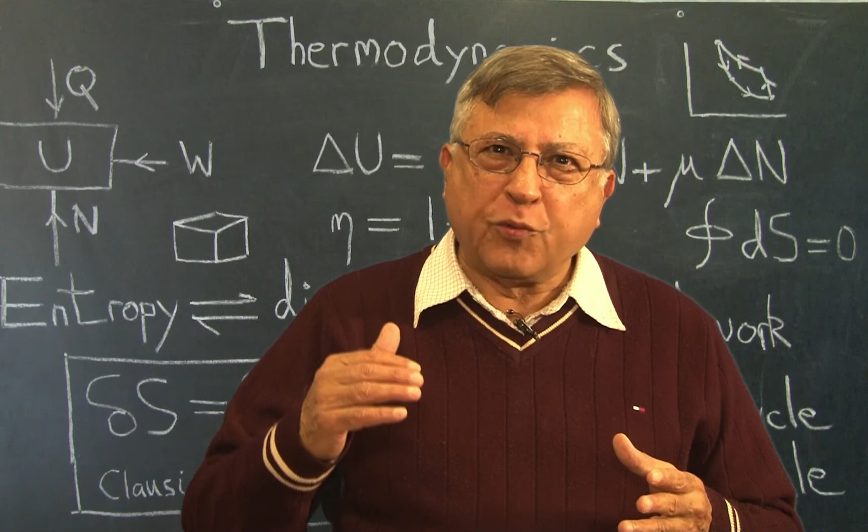Before we move to our discussion of thermodynamic engines, let us remind ourselves about the nature of heat. Heat is a form of energy, but a very particular form. That energy comes from randomized motions of the constituents, which could be atoms, molecules, quarks, gluons, or whatever, but on average their momentum adds up to zero. So an object can be at rest but have a lot of energy if its constituents are moving rapidly enough.

On the other hand, if those constituents are moving in one direction, then the whole object has kinetic energy, but it could be very cold and have no heat or thermal energy. So heat is randomized energy, whereas kinetic energy is organized motional energy.

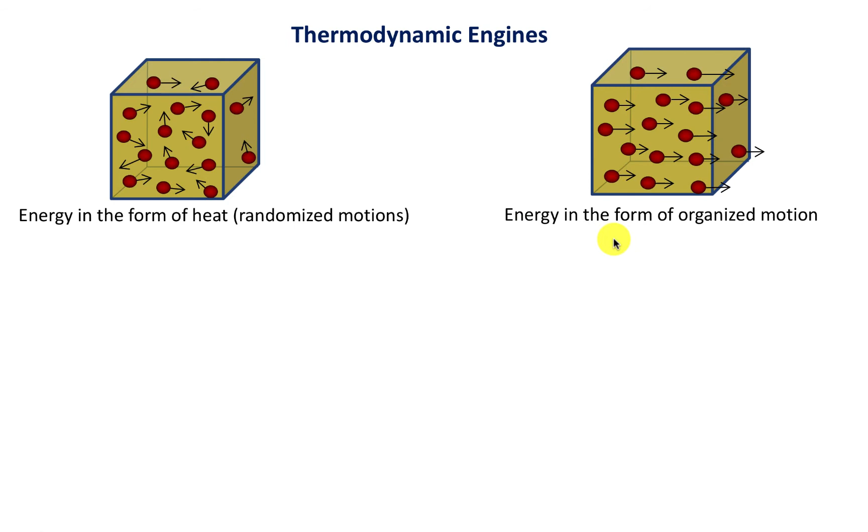We're going to define a thermodynamic engine, or heat engine, as that which converts heat into mechanical work. It could also convert work into heat, but it has to be done through a cyclical process, meaning that whatever state the heat engine started with, it returns to that state at the end of the cycle. So suppose you started with a certain pressure, volume, and temperature - as you go through the various processes within the engine, you ultimately end up at the same pressure, volume, temperature. In this process, work is done.

That work is P dV, and if we add up those little bits of work done as we go around the loop, that is the integral of P dV. This integral has a loop which signifies that the initial point and the final point are the same.

The engine must always respect the first law of thermodynamics, which says that the change in internal energy, delta U, has to equal the amount of heat you put in - say from burning fuel - minus the work done by the engine. Now U, the internal energy, is a state function depending on P, V, and T. So when you come back to the original position, the net change in delta U has to be zero, which means delta W and delta Q have to be exactly the same.

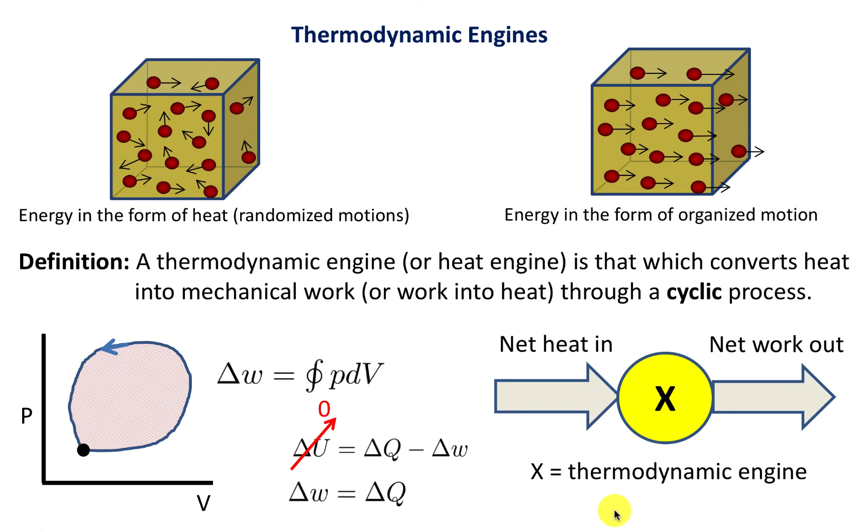Let me denote a general thermodynamic engine of any kind with this circle, labeled X. Whatever heat flows in is converted into work, and I stress this is the net amount of heat that comes in - some heat could come in and some heat could go out. The net heat is the incoming heat minus the outgoing heat.

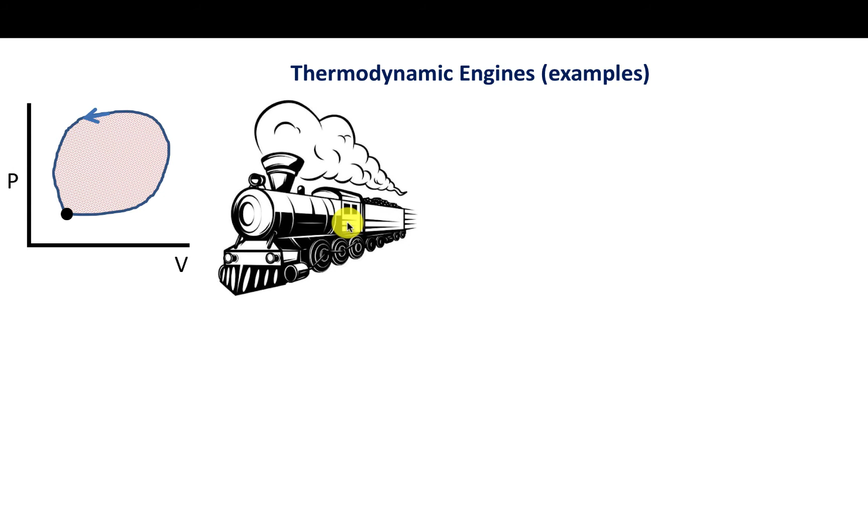Historically, thermodynamics was developed at a time when heat engines like the steam locomotive were being developed. The coal provides the incoming heat, and from the exhaust is the waste heat. The work, or useful work, is that which the locomotive does in pulling the train along. Now we have more sophisticated engines, but the idea is the same: you burn fuel that provides heat, waste heat comes out of the exhaust, and the useful work is what the engine delivers to the tires.

The general idea behind all thermodynamic machines is that there is a high temperature reservoir and a reservoir at low temperatures, which could be the environment to which the waste heat is thrown out.

We denote the amount of heat taken from the high temperature reservoir as QH, which flows into the engine, whether it's this or that. Work is done, and waste heat flows out into the low temperature reservoir, which could be the atmosphere. By the first law of thermodynamics, the useful work done is equal to the net heat, which is the heat taken at high temperature minus the heat rejected at low temperature. Here H means hot and C means cold.

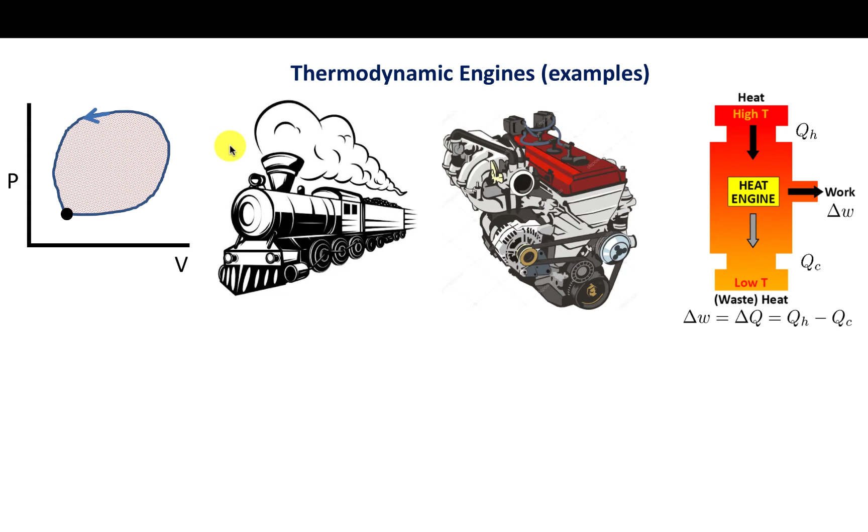Let's not think that thermodynamic engines are restricted to things we make. In fact, there are thermodynamic engines in nature as well. Here is a model of the Earth's atmosphere, which can be modeled as a thermodynamic engine. Heat from the sun is absorbed by the Earth's surface, more at the tropics and less at higher latitudes, the extra tropics. Some is reflected back, but the net heat received at the tropics is greater than at higher latitudes, so the surface temperature there is larger. Again, we have a high temperature reservoir and a cold temperature reservoir, and between them operates a heat engine that does work by moving air from here to here. This helps us understand some aspects of atmospheric physics.

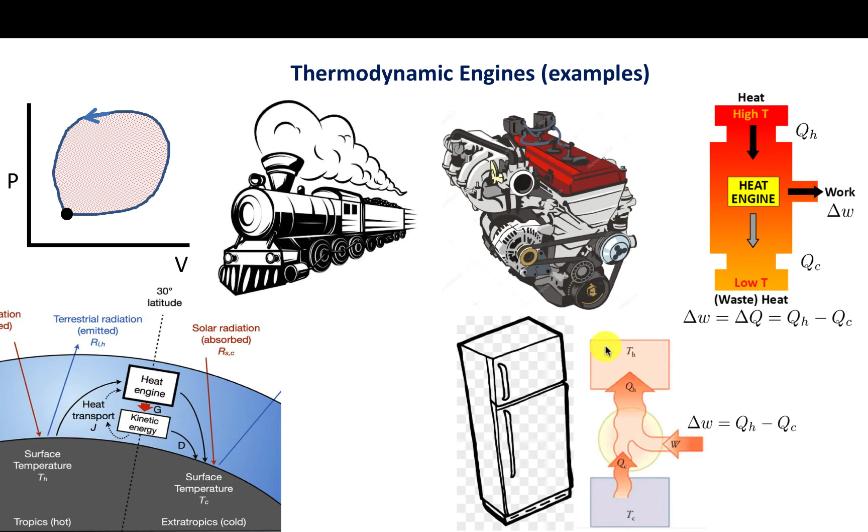As another example, consider a refrigerator, the ordinary household refrigerator, which takes heat from whatever is inside, that's the cold reservoir, and expels heat into the environment, the high temperature reservoir. But this can't happen by itself. The electric motor inside has to do work, so you must supply work in order to move heat from inside the refrigerator to outside. You could say this is a heat engine operating in reverse.

Many principles of thermodynamics were discovered by Carnot, and in particular we will spend time understanding the Carnot engine, which is a reversible thermodynamic engine. Remember that a reversible thermodynamic system is one that is in equilibrium at every point. This engine uses some working substance, which could be either a gas or a liquid.

In the first part of the cycle, the working substance, gas or liquid, expands isothermally from point A to point B. Isothermal means that at every point the temperature is constant, and that constant temperature is the temperature of the reservoir. So at every point along this path, the temperature equals the temperature of the hot reservoir. Obviously TA and every point over here, including TB, are equal.

Then from point B to point C is an adiabatic expansion. Adiabatic means that no heat is allowed to enter or leave the engine. Then from point C to point D, we follow a path which is again isothermal, but this time it's compression, so the volume is decreasing instead of increasing. Once we reach point D, adiabatic compression takes place, so again no heat is lost or gained on this path, but now the volume is decreasing, whereas earlier it had been increasing.

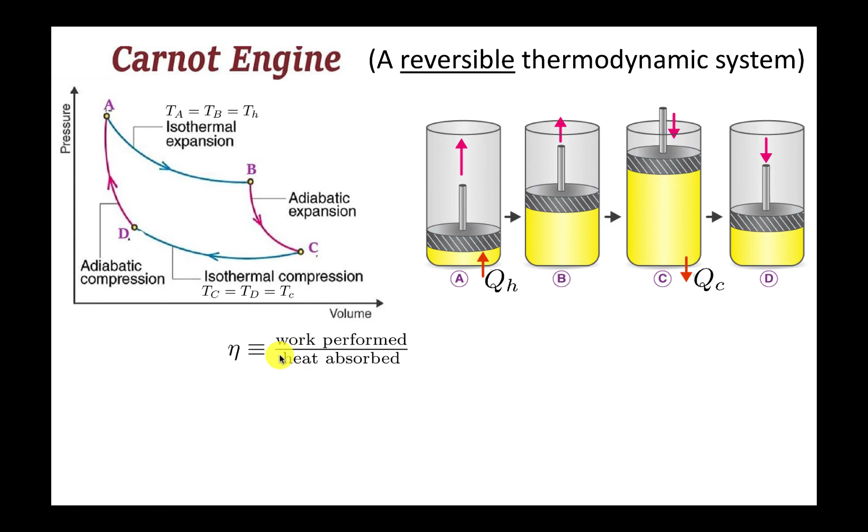However, work is done on every segment, because the volume keeps changing. Let's define eta, the efficiency, as the total work performed over one cycle divided by the amount of heat absorbed. From the first law of thermodynamics, that amount of work, delta W, is QH minus QC.

When we divide by the amount of heat absorbed, that heat absorbed is QH. So eta is this quantity, 1 minus the amount of heat expelled divided by the amount of heat put in from the hot reservoir. Of course, if QC was 0, if no heat was expelled, if there was no waste heat, then the Carnot engine's efficiency would be 100%.

The Carnot engine is very important in thermodynamics. You can ask the question, has anyone ever built a Carnot engine? The answer is no. Why not? Well, there are at least two good reasons.

First of all, a Carnot engine has to be a reversible thermodynamic system, which means you have to do things very, very slowly. To go from this situation to this, to this, and come back, or to go around this path, would take an infinite amount of time, theoretically. Of course, actual thermodynamic equilibrium is established after a few atomic collisions, so one really doesn't need an infinite amount of time. A few microseconds could be enough, for example.

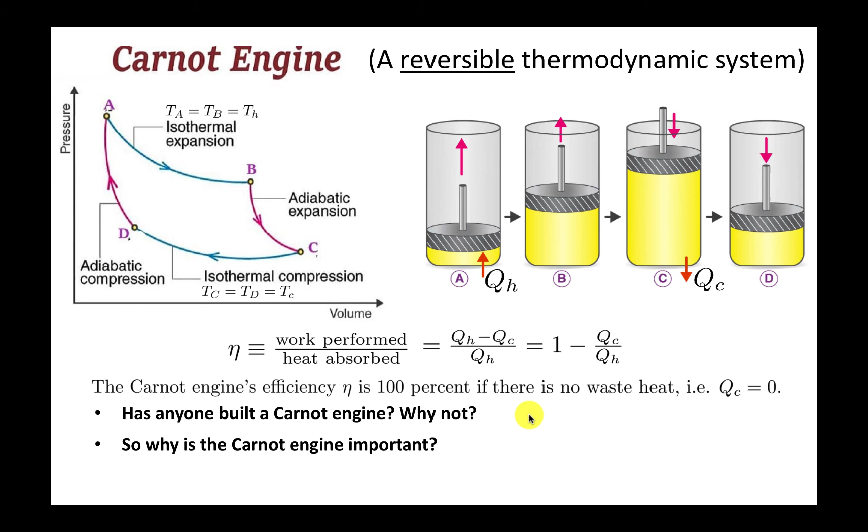Then you can ask, why do we waste so much time studying the Carnot engine? Why is it so important? The answer is because we can gain a great deal by studying free particles in classical mechanics, and we can gain a great deal from studying the Carnot engine in thermodynamics. They are both abstractions, but abstraction is what physics thrives upon.

Let's now come to something absolutely fundamental, the second law of thermodynamics. There are many ways this law can be stated. One is by Lord Kelvin. His statement is that heat cannot be extracted from a reservoir and converted entirely into work.

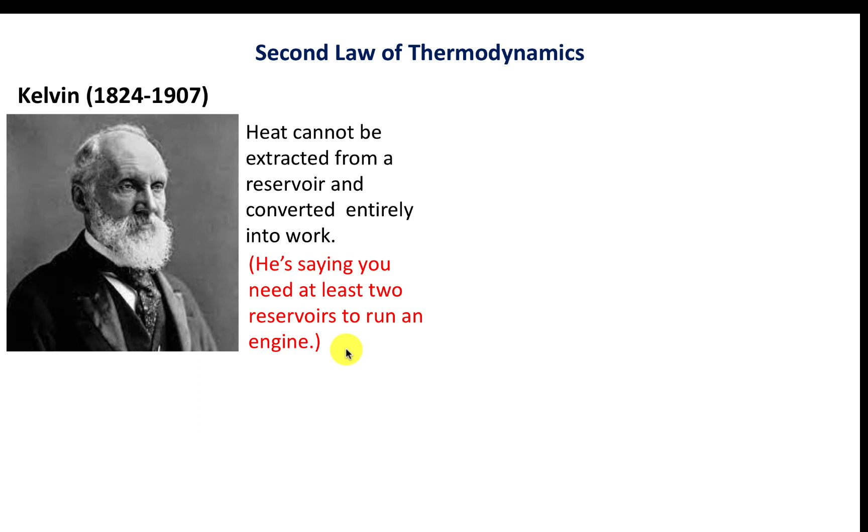So Kelvin is basically saying that you need at least two reservoirs to run an engine, a hot and a cold reservoir. Another way of expressing the second law comes from Clausius. According to Clausius, heat cannot go from a reservoir of lower temperature to a reservoir of higher temperature. Basically, he's saying heat can't flow from a cold body to a hot body by itself.

By itself means you have to do something else to make heat flow from a cold body to a hot body. Now, from the Kelvin statement, the efficiency of any thermodynamic engine must be less than 1. Remember, he's saying you cannot convert heat entirely into work, and efficiency is defined as the work done divided by the heat put in. So obviously, eta is less than 1 according to the Kelvin statement.

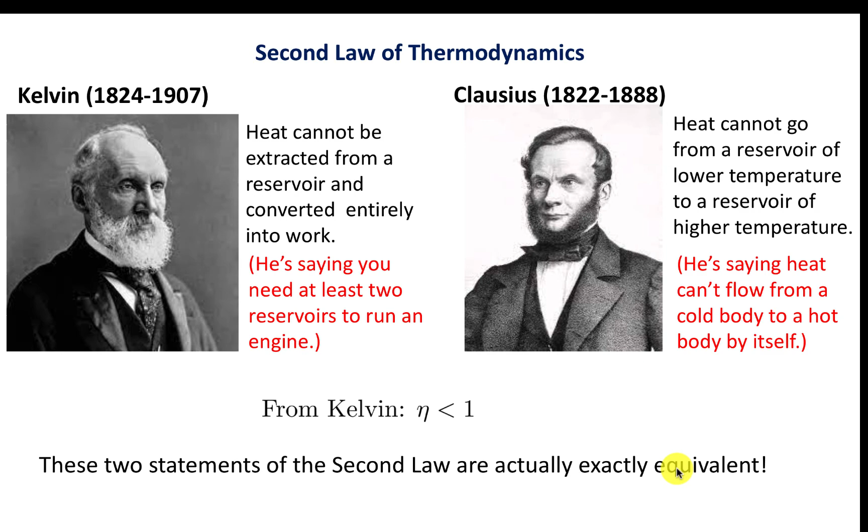Now, these two statements appear to be very different, but in fact they are exactly equivalent to each other, and this is what we shall establish. So, suppose that Kelvin is wrong. Then the engine produces no waste heat.

It is 100% efficient. In terms of pictures, what that means is that heat is taken from the hot reservoir and converted by this thermodynamic machine entirely into work. There is no waste heat that flows into the cold reservoir.

Now suppose I take the work done by this engine and use that in another engine, which then takes heat from the cold reservoir and puts it into the hot reservoir. Now, these two can be made at the same temperature, in which case what has happened is that heat taken from the hot reservoir has then taken heat from the cold reservoir and moved it to the hot reservoir.

So, if Kelvin is wrong, then Clausius is also wrong, because contrary to what he said, heat has indeed flowed from the cold to the hot.

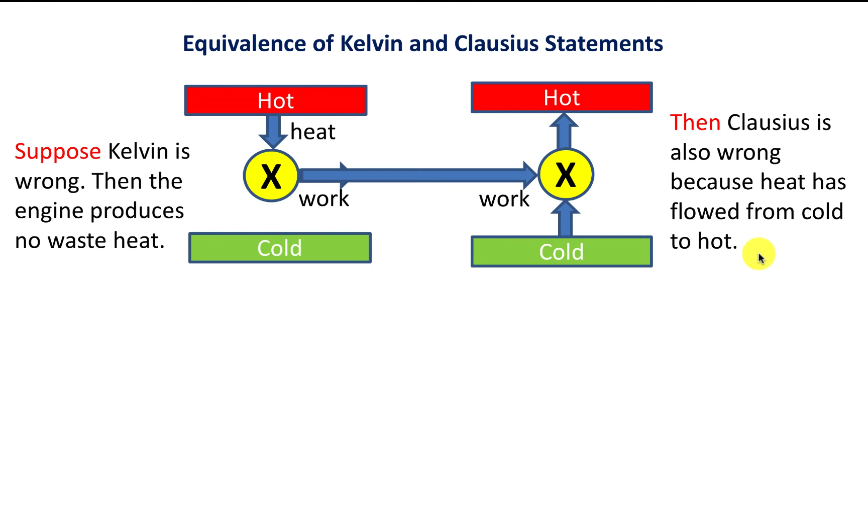Now suppose Clausius is wrong. Then heat can flow from the cold to the hot reservoir all by itself. Okay, let's then take a second machine. That machine takes heat from the hot reservoir and converts it into work.

Now imagine the following: suppose these two hot reservoirs are at the same temperature, and these two cold reservoirs are at the same temperature as well. So the heat Q which goes up then gets returned over here, in which case this hot reservoir is not playing any role at all.

So in fact, what has happened is that from this cold reservoir, remember there is only one now, net work has been produced. But if that is so, then Kelvin is also wrong, because work is produced using one reservoir only.

So, to summarize, the Kelvin and the Clausius statements are exactly the same. If Kelvin is wrong, then Clausius is wrong. If Clausius is wrong, then Kelvin is wrong. And so the two are exactly the same.

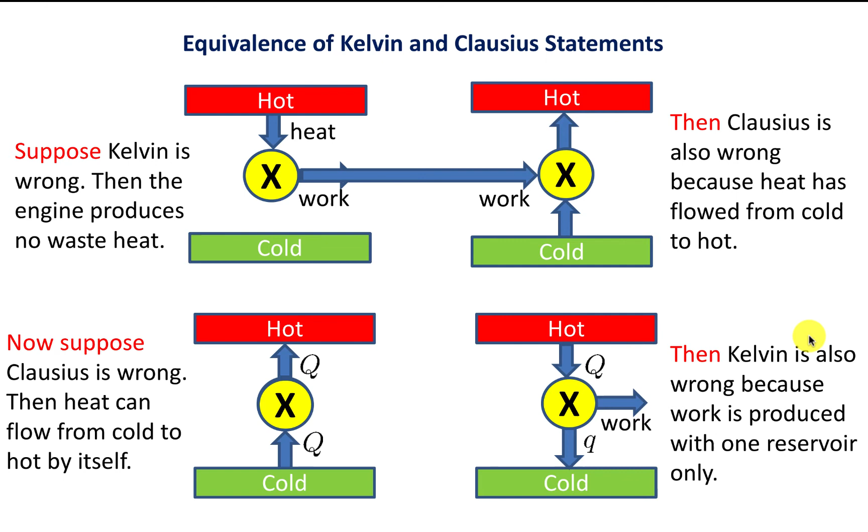Let's now use the second law of thermodynamics to derive some very interesting consequences about the Carnot engine. In fact, this Carnot engine is universal. What that means is that whatever Carnot engine you make, so whatever its shape, size, the nature of the hot and cold reservoirs, or whether you use a liquid or a gas, and whether that gas is an ideal gas or not, in every case we'll be able to see that the Carnot engine has universal characteristics.

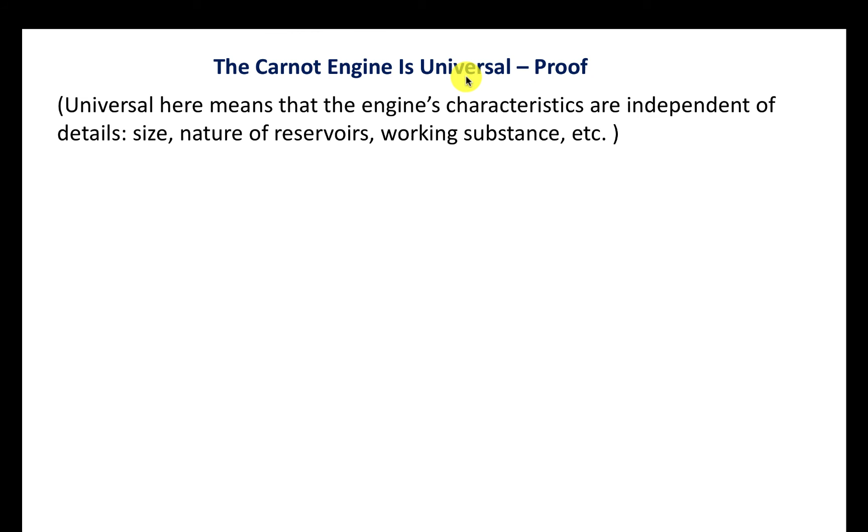To prove this, let's take a hot reservoir and a cold reservoir, use this engine, and this engine can be any engine. It can be a non-reversible engine, not necessarily a Carnot engine. So this engine takes in heat Q1, expels heat Q2. The amount of work that it does is the difference of the two.

Now, between the same two reservoirs, we have a Carnot engine. But this Carnot engine will be operated in reverse, which means that we are going to give it work. We're going to put in work and pump heat out from the cold reservoir into the hot reservoir. So this is just the Carnot engine that we talked about, except that all the arrows have been reversed. This is going in instead of coming out. This is going out instead of coming in, and same for here.

Now let's do a little bit of bookkeeping. So we're getting energy W out from here. That W is Q1 minus Q2. And we're putting in work W prime. So the net amount of work that we're getting out is W minus W prime, which is simply this.

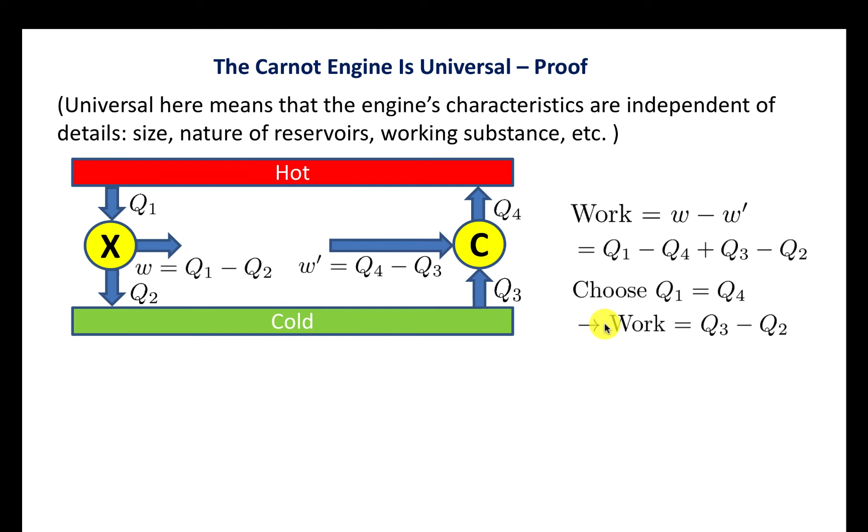Suppose I choose Q1 equal to Q4. That means the heat that's coming in over here is equal to the heat that's going out over there. In that case, the net amount of work is simply Q3 minus Q2.

But we've just heard Lord Kelvin say that work cannot be extracted from a single reservoir. You need two reservoirs. But look, over here, this is essentially one reservoir because the same amount of heat is being extracted as is being given back. So you can just remove this reservoir, and so we have one reservoir only, just the cold reservoir, in which case the work has to be zero or a negative quantity.

So this work is less than or equal to zero, which means that Q3 has to be less than or equal to Q2. We talked about engine efficiency earlier. That was the ratio of the work that is extracted from the machine divided by the heat that is put into the machine. And so the engine efficiency for X is simply the work, which is Q1 minus Q2, divided by the heat that is put in Q1, and that's eta X, which is 1 minus Q2 over Q1.

Well, we can do exactly the same for the Carnot engine, and here, if you simply reverse all the arrows, the efficiency of the Carnot engine is then simply 1 minus Q3 over Q4. But since we have chosen Q4 and Q1 to be the same, it's equal to this quantity. However, you see that Q3 has to be less than or equal to Q2, and so that says that eta C has to be bigger than or equal to eta X.

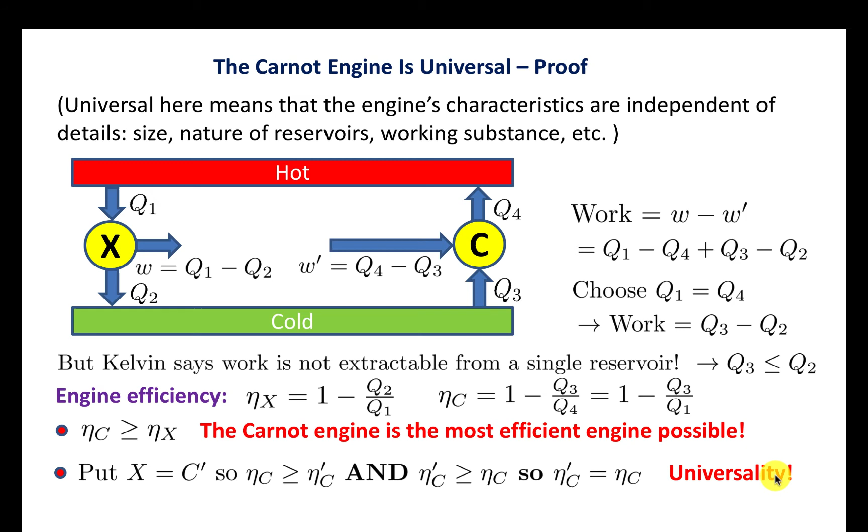That's because we've compared it with an arbitrary engine, X. But of course, we could have chosen X to be the same as C. Then let's put X equal to another Carnot engine. So eta C then has to be greater than the efficiency of C prime, but also the efficiency of C prime has to be greater than the efficiency of C. So obviously there's only one solution, which is that the two Carnot engines are equally efficient. In other words, this is a proof of universality. It doesn't make any difference as to what that Carnot engine is made of.

Let's now analyze the Carnot engine, but now assume that the working substance is an ideal gas. That makes it possible to do the calculations easily. So, to remind you, here is the situation: this isothermal expansion, adiabatic expansion, then isothermal compression, and then finally adiabatic compression.

Let's see how much work is done in going from A to B. Well, actually, we've already calculated this in module 1.4, and we found that the work done in going from here to here is R times T. Remember, there's only one temperature. This is all at temperature TH, into the log of the volume at point B divided by the volume at point A. So this came from using PV equals RT. And remember, we're considering only 1 mole of gas, so N is equal to 1.

What about the amount of heat that we had to put in? You remember that for an ideal gas, the internal energy just depends upon the temperature. And so the internal energy here, and the internal energy all along, including here, remains constant. Since there's no change in internal energy, the heat put in is exactly equal to the amount of work done, and so QH is this quantity.

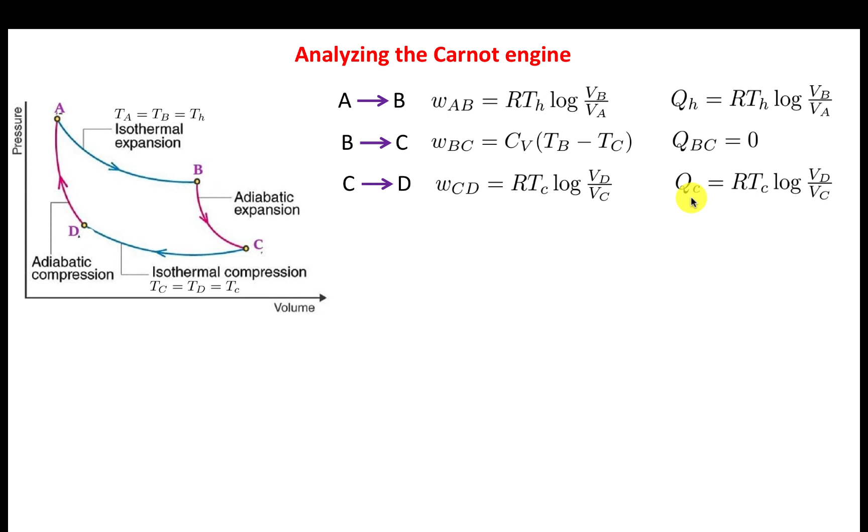Finally, let's look at the D to A segment. We don't have to redo this calculation. You can see that the work done in going from D to A will be CV times TD minus TA. Again, this is an adiabat, so no heat was gained or lost.

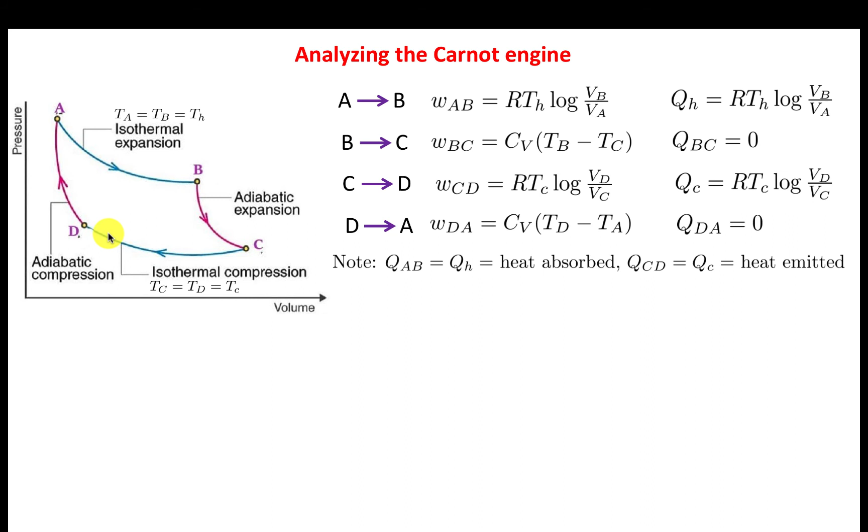If we look at the total amount of heat that's absorbed, that's just what you get from segment AB. If you look at the amount of heat that's wasted, that's just in this segment over here. Let us now look at the total work output. Add up the work done on all the segments A to B to C to D to A, and that's this. Let's look over here.

WBC is this, TB minus TC, whereas WDA is TD minus TA. As you can see, this over here is an isotherm, and similarly TC and TD are equal. So if you add up WBC and WDA, that sum is equal to 0. So the only work that is done is on this segment and on that segment.

In the first segment, we have log of VB over VA. In the third segment, we have VD divided by VC. But is there any relation between this and this? Of course there is, because this gas has expanded adiabatically from here to here, and we know that for adiabatic expansion, PV to the gamma is a constant, or you could say TV to the power gamma minus 1 is a constant, and so whatever its value here, the same value exists over here.

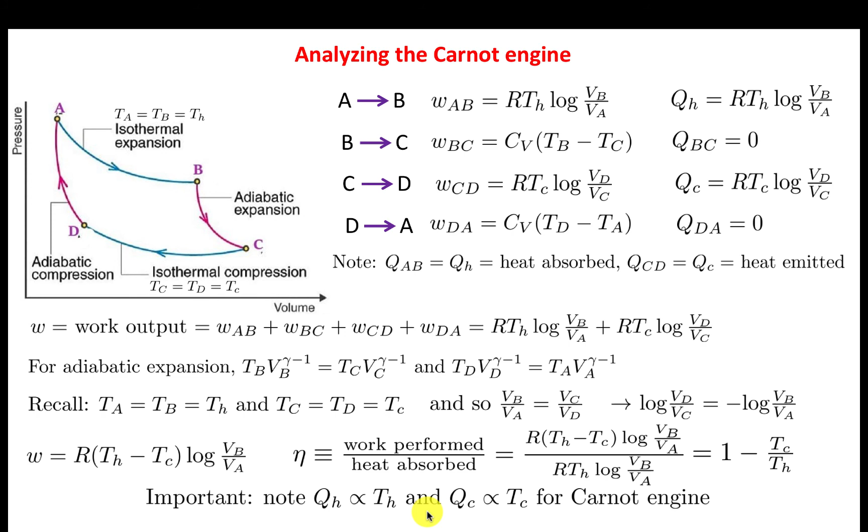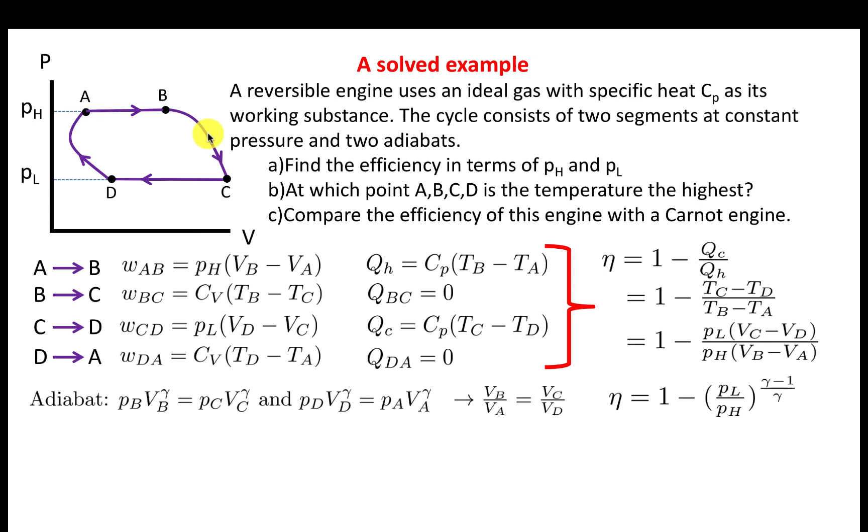Now let's go to the second part: at which point, A, B, C, or D, is the temperature the highest? From PV equals RT, obviously TB is bigger than TA. Look over here, the pressure is constant, so the temperature is proportional to the volume. T is proportional to V, which means that as this gas expands at constant pressure, the temperature goes up. Equally, as this gas gets compressed into a smaller volume, its temperature has to decrease. So obviously TB is bigger than TA, and TC is bigger than TD.

But what about over here, from B to C? We see, using this adiabatic equation, and remembering that gamma minus 1 is a positive quantity, that we finally conclude TB is the highest temperature.

Unfortunately, I have run out of space and time, so I leave this very last part: find the efficiency of this engine and compare it with a Carnot engine. Of course, what you will find is that the efficiency will be less than that of a Carnot engine. Good luck in proving this.